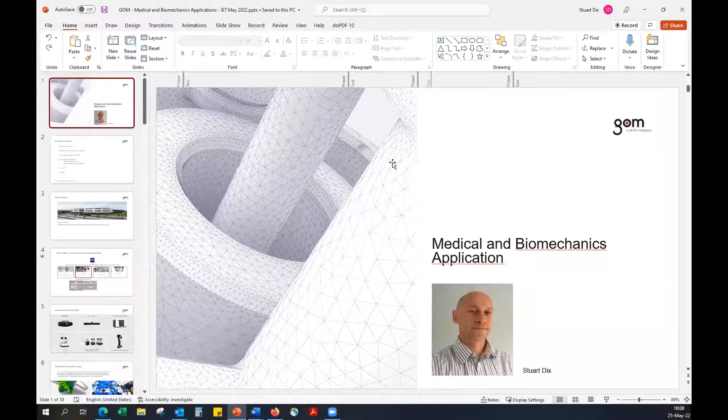So I'll jump straight into sharing my presentation. What I will do is I'll just stop my video because it will probably help with bandwidth and things to run smoothly. So what we should have is the start of the presentation.

So welcome everyone. My name's Stuart Dix. I look after sales of GOM equipment in the UK, specifically in the Midlands or the middle of the UK. And ordinarily I would have been joined by my colleague Amy Hatte, who specialises in one of our portfolios, the testing equipment. She can't be with us today, so I'm going to do the testing bit as well. But any questions at all, please throw them into the question box or the chat box, and we'll try and come to them at the end.

So what are we going to look at today? A little bit of information about who GOM are, who Zeiss are, and where that link comes in. What solutions we actually offer to the industry, so what does our equipment actually do? And then we're going to look at a couple of case studies. One of them is looking at actual medical fitting of a knee using one of our pieces of equipment, the Atos system. We'll also look at Aramis. I'll talk a little bit more about what the two systems do and how they differ. And then we've got a little bit of information at the end just for a bit of fun, and then we'll summarize and go into Q&A at the end.

So the company itself, GOM, is based in Braunschweig in Germany. The next slide is going to lead on to the development of the company and who we are today and over the next few months. But the company was founded in 1990, a privately owned company. And in the UK, we're based in Coventry, and we have 20+ people there, dedicated to sales, support, marketing, training, aftermarket care. So basically everything. So when a customer buys a system, it's a complete journey to get them on the road and gathering good data.

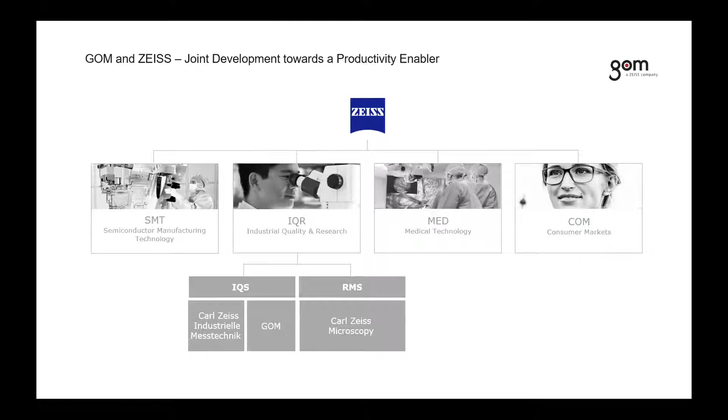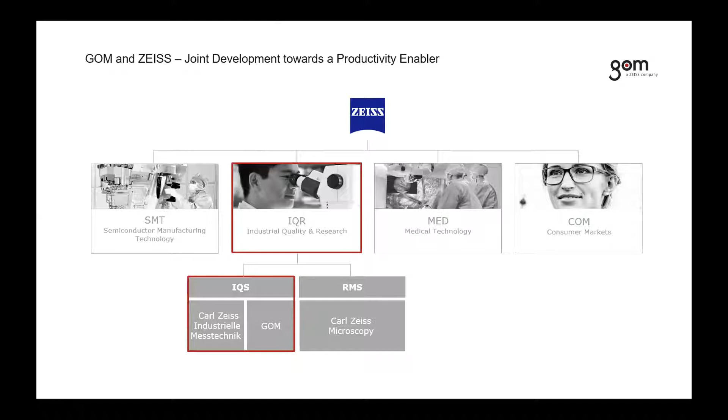So for the last 3 or so years, we've started to merge closer with the Zeiss group, so we're now part of Zeiss. If many of you don't know who Zeiss are, they're quite a major player in the manufacturing and also metrology world. A lot of people wear glasses, and the lenses themselves are quite commonly Zeiss lenses. They also produce high-end optics for digital SLR cameras, microscopes, and those sort of things. There is also an industrial quality section, which is highlighted here, and this is where GOM fit in. So very much the industrial metrology and inspection of industrial components.

So because of this joint venture between GOM and Zeiss, we now have quite a wide portfolio, from 3D metrology to measure the surface of a component, the exterior. We also have 3D testing, looking at real-time deformation, displacement, how things move. We then move on to industrial CT or X-ray systems, where we can penetrate the material of a component and look internally as well as externally, so we can look at dimensional information inside as well as looking for defects. We also have contact systems, CMMs, non-contact vision systems with multi-sensor, and handheld or tracked laser scanning systems. So quite a wide range of systems to suit pretty much any application, any budget, any need.

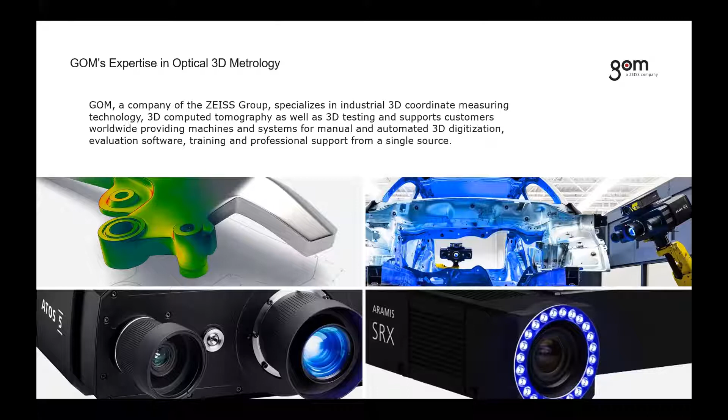So the GOM equipment that we're going to talk around today is specifically Atos, on the bottom left here, and Aramis on the bottom right. These are the sensors, the actual hardware that we develop at the facility you saw in Germany. And we also develop, produce and sell our own software, which is widely used. If you're manufacturing components or have any need for inspection, there's a reasonable chance you may be using our software somewhere. And to finish it all off, we also have completely automated solutions, where our sensors are mounted onto the end of a robot, a high accuracy, high repeatability method of inspection.

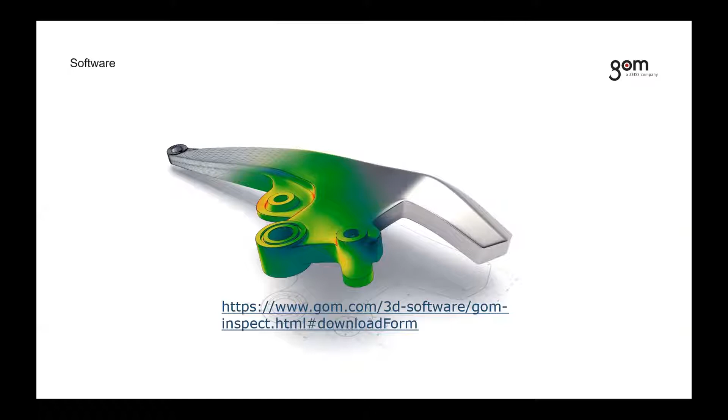And just one final thing on the software. As I mentioned before, it's our own software, we develop it, and all of our solutions come with a seat of software included. The link that just popped up on screen allows you to download a free version of the software. If you want access to this link, just pop a message in the chat and I can get back to you with some more details.

This not only allows you to look at CAD data, you can also use information from a CMM or from a scanning arm, and pull that data into our software. So it's very, very powerful, and as I say, free to download. Then as you grow and need to do more with it, there are further options available.

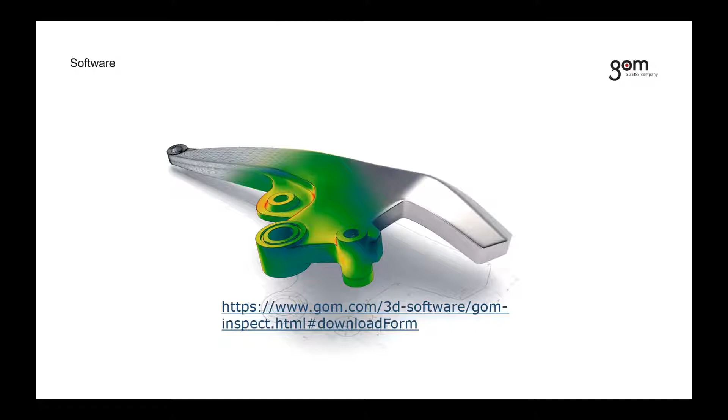So a little bit of information about Atos. I mentioned Atos before - what is it? Atos is the actual hardware for capturing 3D data. It uses high-speed fringe projections to map out the surface geometries of the part. We're capturing hundreds of thousands, if not millions of data points, and creating a 3D digital twin of the part. Once we have that exact copy of the real part, we can inspect and compare against CAD and do dimensional inspection to check if everything is correct as intended with the design.

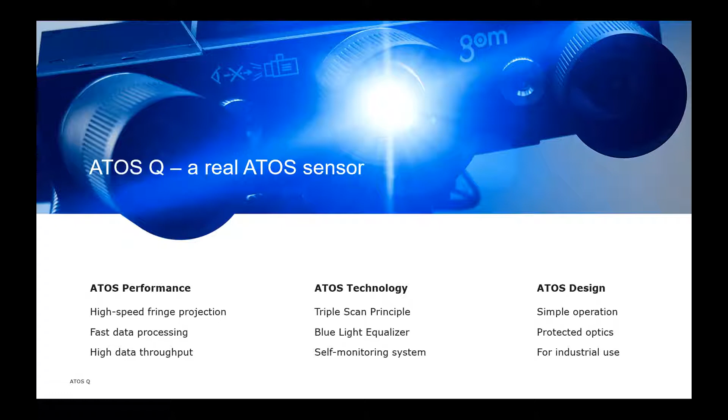This system can be used purely as a manual system, where you point the sensor, move the part, capture more data, and so on. It can also be used in a semi-automated way, where we use a rotation table - an automatic rotation table. You put the part on and let the system do the rest.

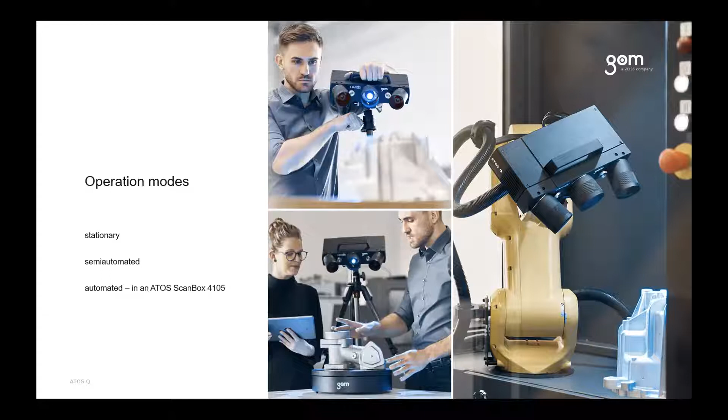We also have fully automated systems, shown on the right-hand side, where we mount the sensor onto a robot. The picture here shows a typical example of measuring multiple parts in one go. In the medical world, say for example, you want to measure multiple femorals, or maybe bone screws, something like that. You can measure multiple in one go, which really speeds up your inspection.

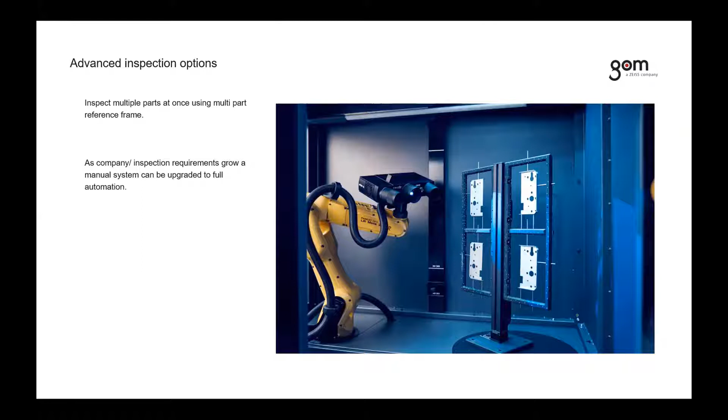I've got a short video that I'm just going to run through now, and it gives you a little flavor of how the system works in reality.

So just a nice little video there to show an example of how the Atos side of things works - capturing external data.

Now we're going to jump into looking at a couple of examples of how this sort of technology is going to be used in the medical world. There's a couple of pointers on here - I've actually taken this from another presentation, so there's a few things taken out that aren't really relevant. But the information I want to share is a case that was done recently, and it fits quite nicely with the story we try to tell with our systems. We're very much providing a solution to a problem.

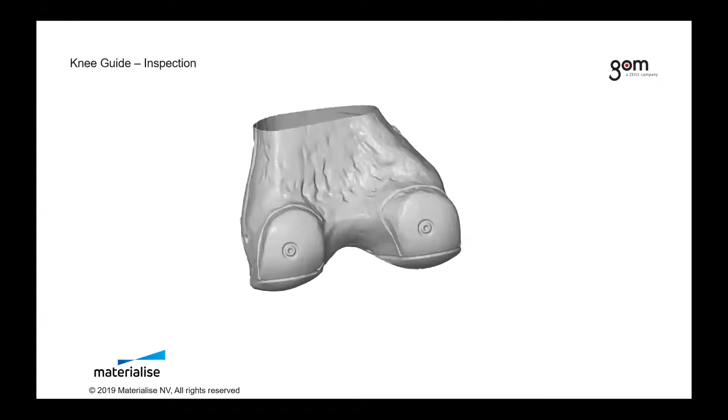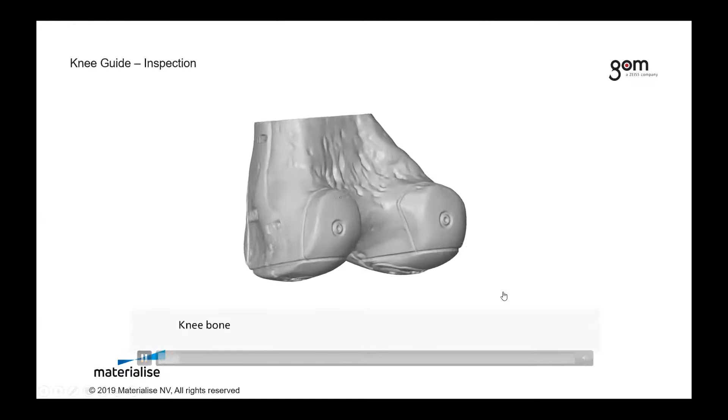So the little video that's going to run through here just shows a typical inspection process. If I just play the video here - so you have the scan data, you can see there very high resolution scan data, and you have the 3D printed guide underneath.

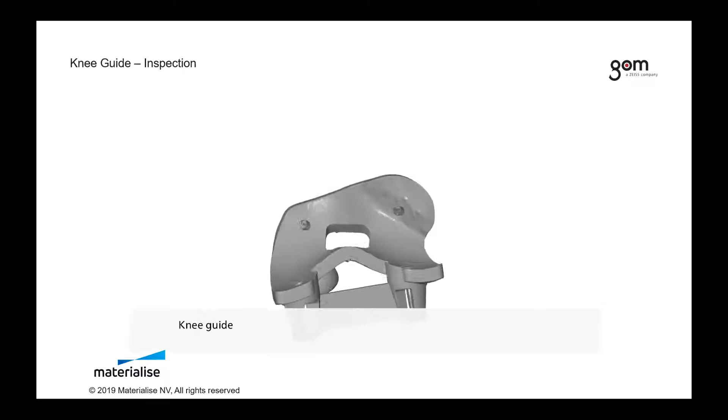And what we'll see in the next scan is the color plot there. So what I'll do is just pause it for a second, because what we're looking at here is typical inspection data that we're pulling out. The resolution, the amount of data points that we capture as standard, is very, very high.

So you'll see here, if I just put my pointer on, you've got different colored areas. The blue areas are telling us where we don't have enough material. Red areas tell us where we have too much material, and green and those sort of warmer colors are telling us that maybe we're in the right place according to our tolerances.

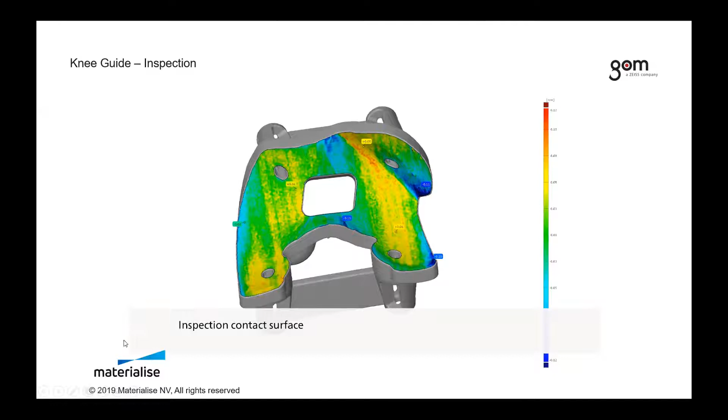So what it starts to do is paint a picture of what is good and what is bad. Essentially the knee, the femoral itself, is going to sit into this guide. So the information we can get from it is whether the knee is going to sit correctly in the guide.

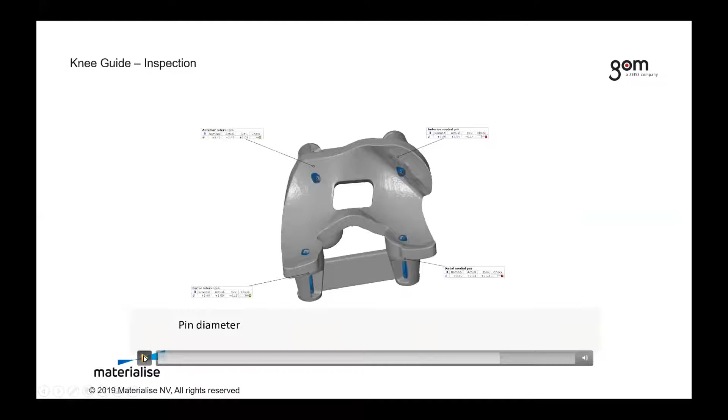In the case of this image, you've got the diameter of the pins and the actual positions of the pins themselves, because it's highly important that they're in the correct place. If it's not in the right place, the surgery can't go ahead, and everything has to be repeated another day. So it's lost time, increased cost to the NHS, all things that are really unacceptable. It's a nice example of where this type of technology is used on a day-to-day basis.

What I'm going to do now is move on a little bit to the Aramis side that I talked about before. Just as a recap, Atos is for capturing external geometries - we're digitizing and scanning the whole surface and creating a static digital twin of the part.

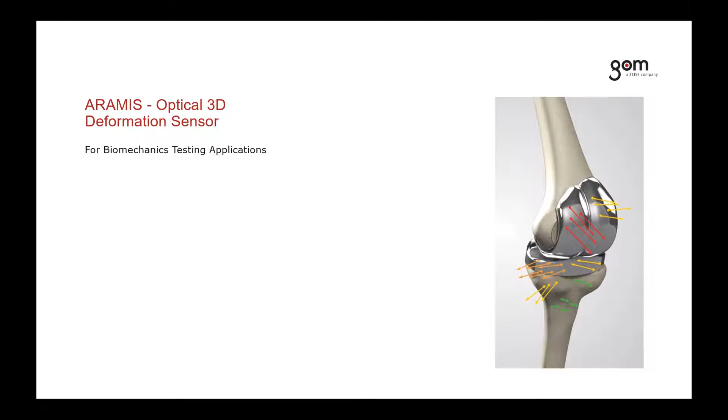What the Aramis systems are doing is optical, non-contact measurement of deformation. We're looking at how things move, how things twist, and how they react to being put under load. In a similar way we have a light source, and two very high-speed cameras that give us very high frame rate measurements of the part, very high detail. It gives us a lot of information, such as how things move, not just in one axis, but in 6 degrees of freedom in this case.

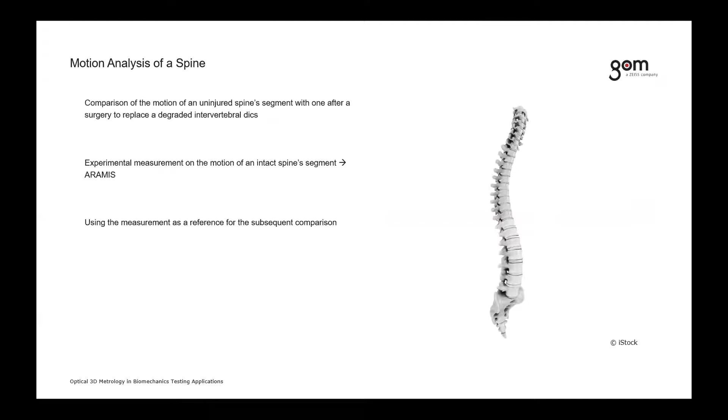So it can suit pretty much any application, but specifically today we're just looking at medical. The example we're going to look at here is the actual real-time motion analysis of the spine, in particular looking at things like disc protrusions, that sort of information we're trying to pull out.

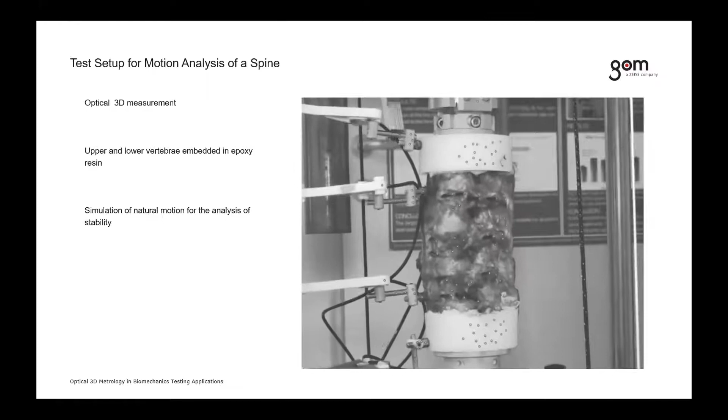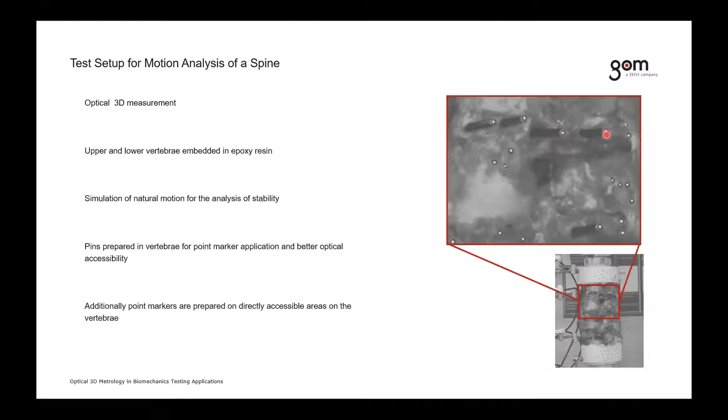In the video you see here, this is a typical test rig, if you like. They've taken a section of spine, and you can see there's a number of dots positioned on it. This is what the system will use to track in real time what is actually happening as the part is moving. You can see a zoomed in section of the setup - there are some pins positioned into the actual bone itself, with little reference points on top. Again, this allows us to track what is going on.

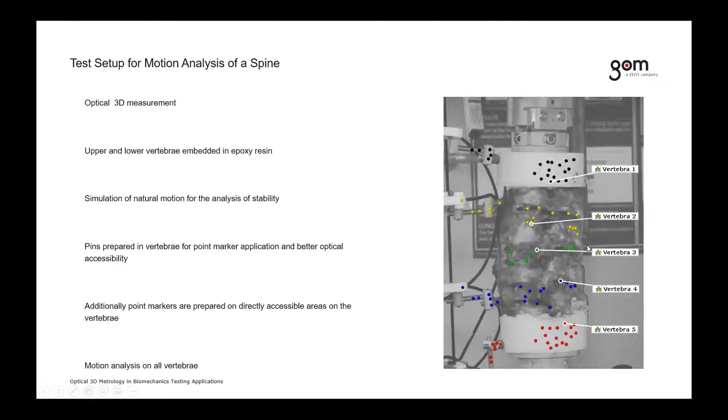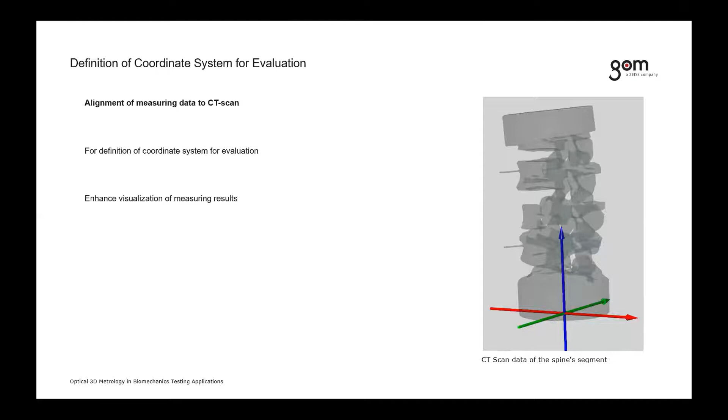The information we gather from this allows us to create reference data, and you can see the different colors representing different vertebrae in this example. This is a nice slide because it shows how we can link Aramis data to different types of scan data - in this case CT scan. So we've got internal and external data going on. Once we have all that information together, I'll move on to the next one.

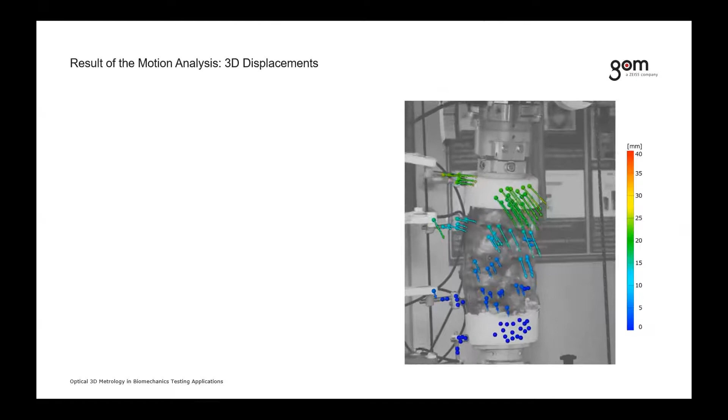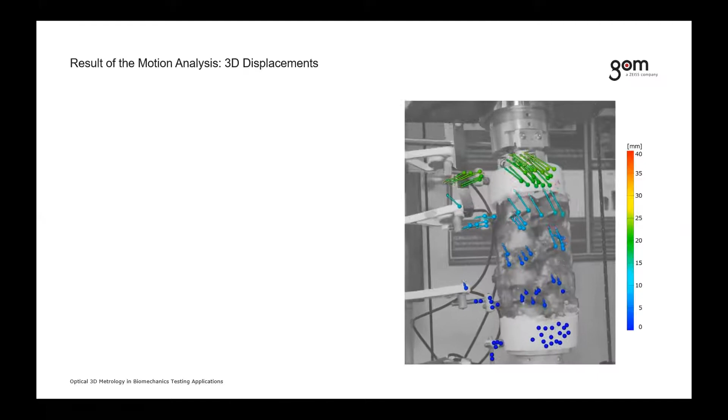This is the sort of information we can pull out using the software - it's actually tracking those points and looking at the vectors. So as the part is put under load, we can see what is actually happening. Simulation software may tell us that when you load it in a certain way, it will move and twist in a certain way with a certain amount of force. This data, because it's real time, is actually looking at the part itself. This gives us real time information of how things move, at what force, and in what direction - so very, very powerful information.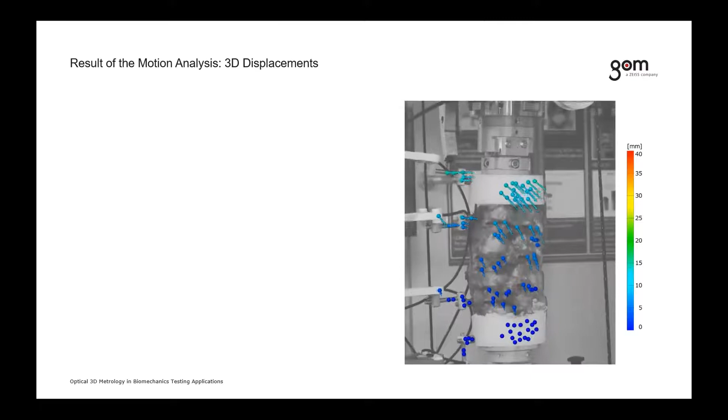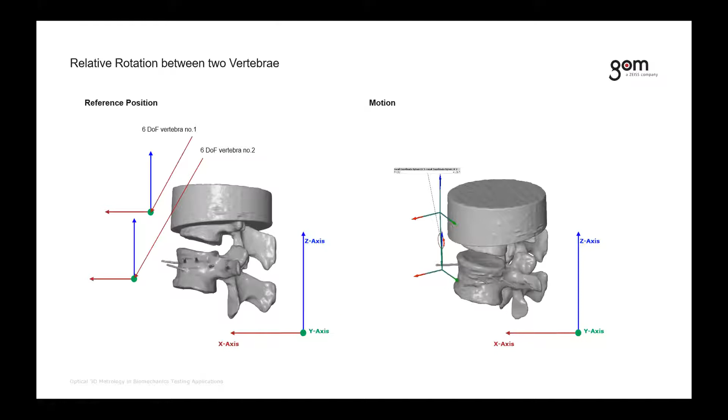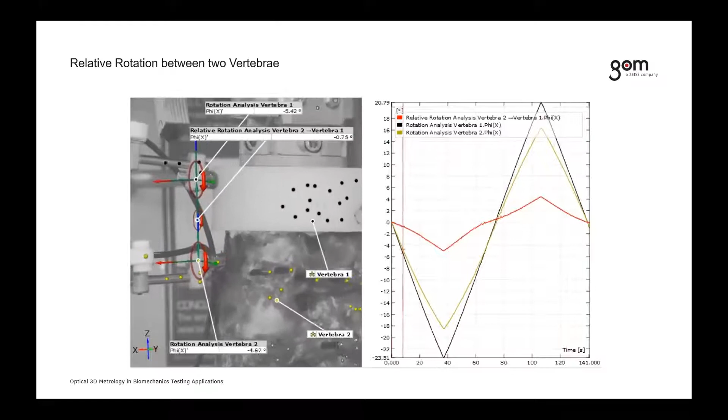This is just another example. You can see the gray part - these sections here are actual scan data, captured with either Atos or maybe CT data. We can then combine that with Aramis to actually see how things twist and how they move. Again, this is the same sort of test but looking at different data - rotational movement graphically, so you can pick out certain points as you can see here.

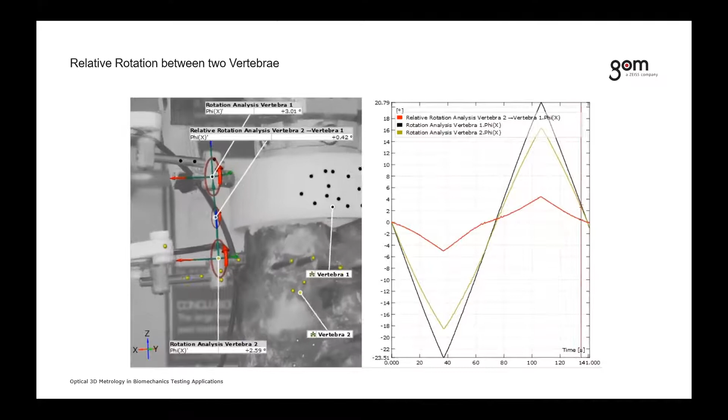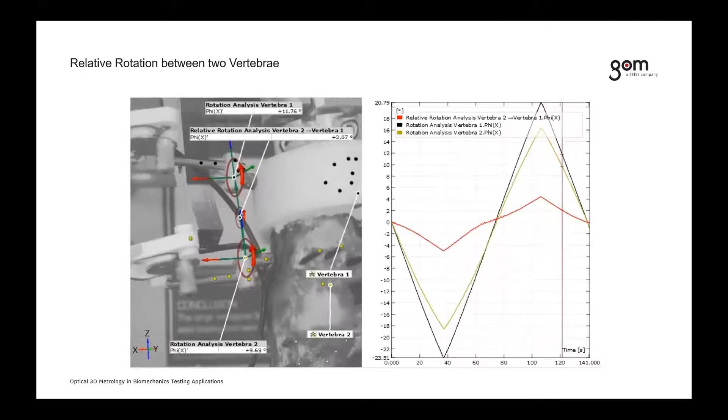Once we've scanned the data, either with Atos or CT, we've got a lot of options available for how we analyze it. That's where it becomes very powerful, because traditional analysis of how things move might involve using strain gauges or LVDTs. The problem is you're only measuring the strain or stress in one particular place. You don't know what's happening elsewhere. This is where this technology fits very well.

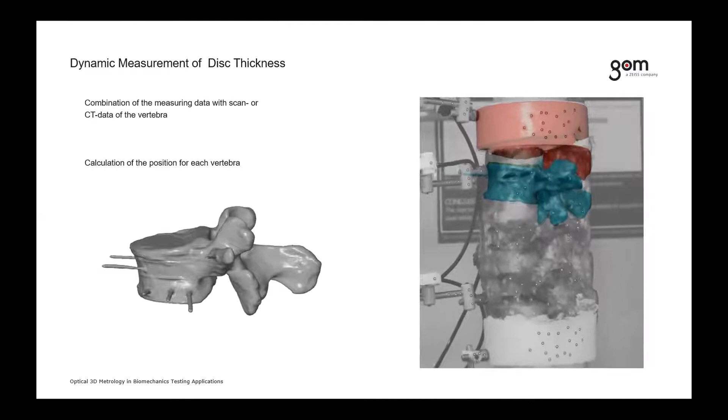This slide combines scan data from Atos or CT, looking at the actual gap between this particular vertebrae and the next one above it. You can see from the color plot that warmer colors indicate a larger gap, and cooler colors indicate a smaller gap. It's very visual - you could show that to anyone and it's quite clear what's going on. As the vertebrae are loaded, bigger gaps appear, and obviously smaller gaps appear elsewhere.

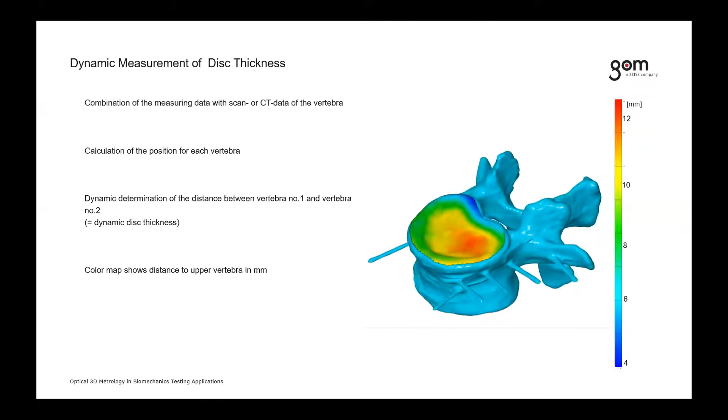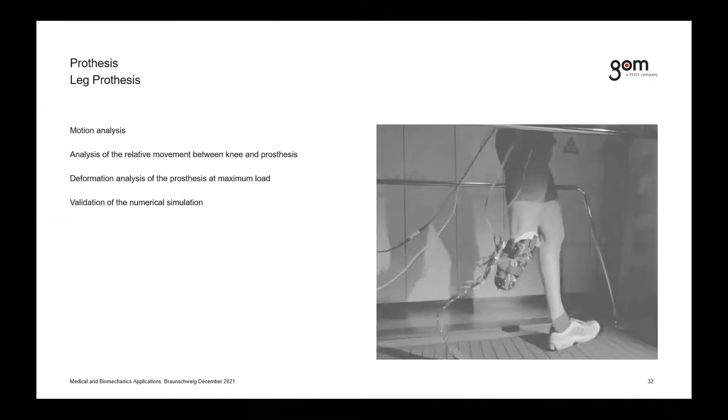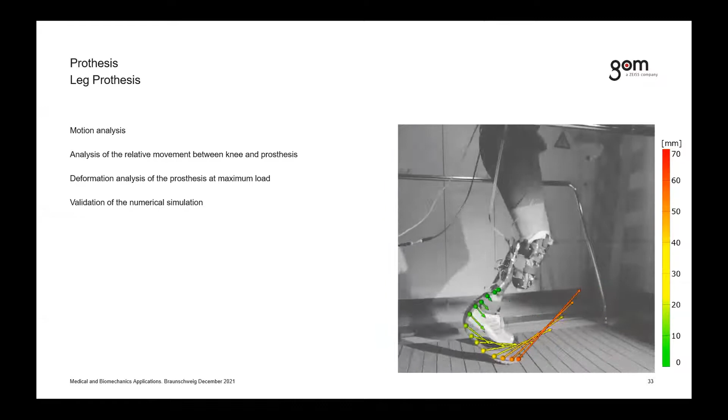The next example is again an artificial leg limb. This is a similar test, but we're looking at faster movement - it's slowed down slightly, but it's tracking the limb as the person runs on the treadmill. The next slide gives us high-level data to see how much the blade is moving in a certain area. This is all to do with validating simulation data.

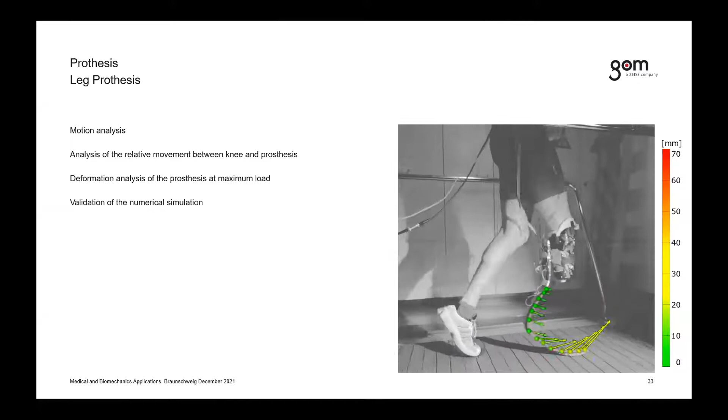Simulation data will tell us so much, but it's not real life. This is actually showing us what's happening in real time. Because we're tracking points on the part itself, we can use the software to pick out certain points and plot them graphically - how is point 1 moving compared to point 2, point 3 in this case. So again, a really powerful set of data.

That pretty much brings it to the end of the examples I wanted to show. There's another slide I want to show here, which is just for a little bit of fun, really.

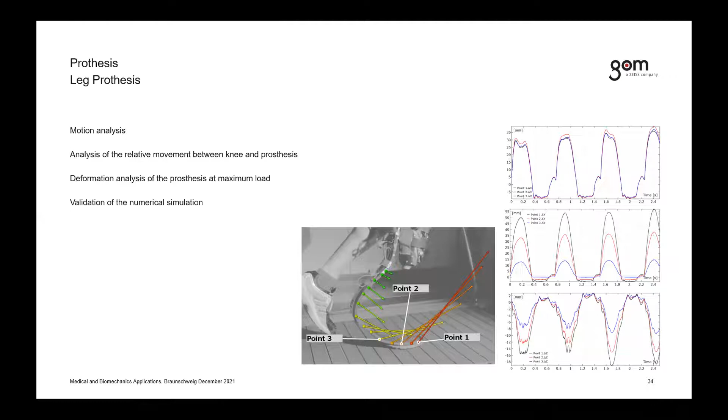We engaged a lot of colleagues, both in the UK and worldwide, to share their own videos using this type of data. This is really just to show what you can do once you've got this data - it's not specifically for looking at medical implants or how an airbag goes off, that sort of thing. So I'll just show this with you guys.

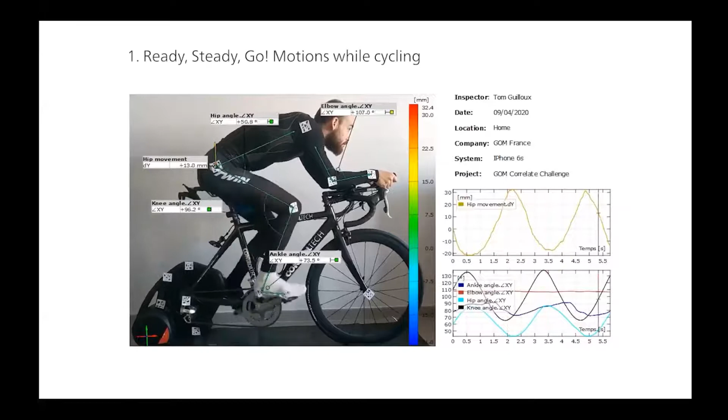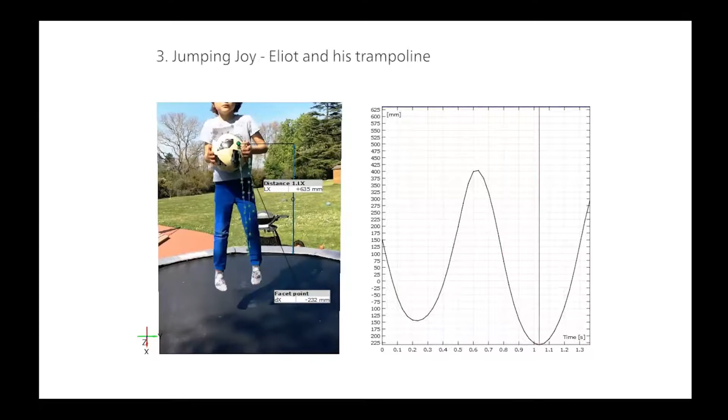This was an actual competition we ran between all of our colleagues to see who could come up with the best idea, the best thing to track and to show.

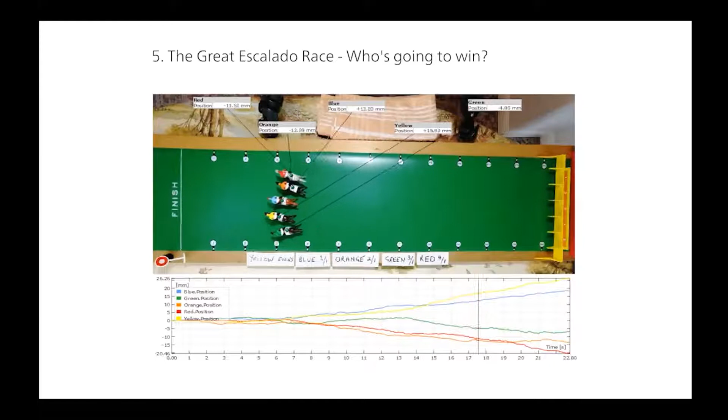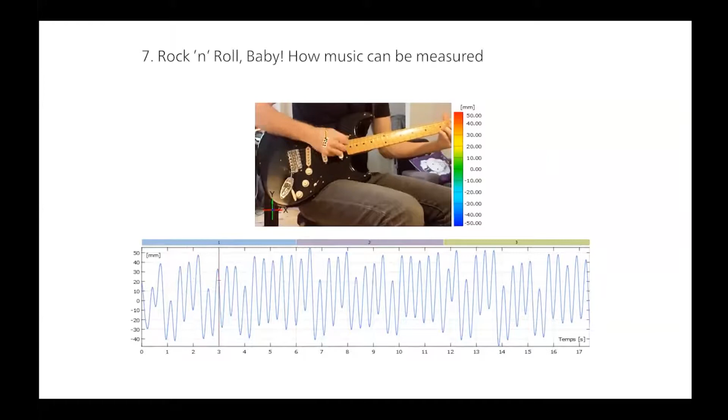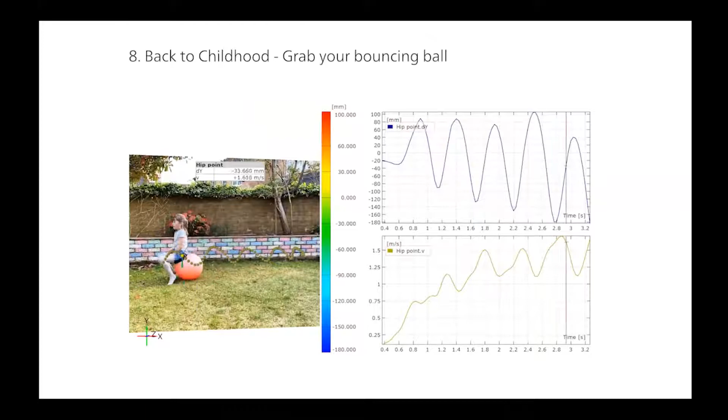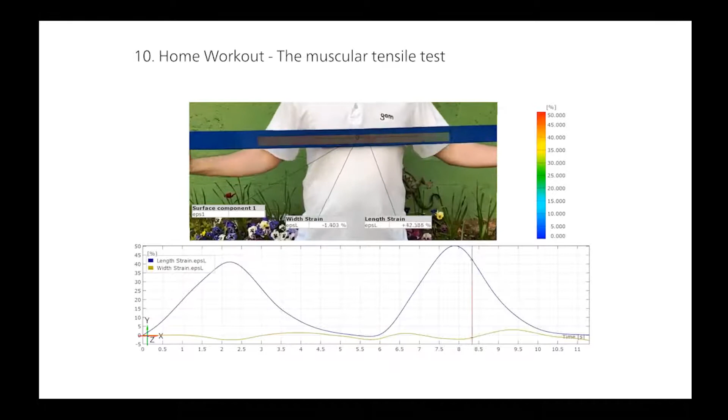Hopefully this might be inspiring some of you as to where you could use a similar technology, or maybe it'll fit in for what you're doing as a work challenge. As I say, a bit of fun at the end, just to show you what's possible.

So, summary of what we've talked about. The actual portfolio of solutions is pretty much any solution to suit any budget and any application. We have systems that can be used to measure external geometries - this would typically be the Atos systems. Or we can look at real-time deformation, displacement, stress, strain - this would be the Aramis side of things.

All of the systems can be scaled up or down. You have the main basis of the sensor, and then by just exchanging lenses, we can go from measuring something very small, the size of a coin, all the way up to something as big as a wind turbine blade, a helicopter blade, or a complete vehicle or boat. We have various solutions - handheld systems, laser-based systems, manual or semi-automated systems, all the way through to fully automated solutions for measuring complete vehicles inside and out, as an example.

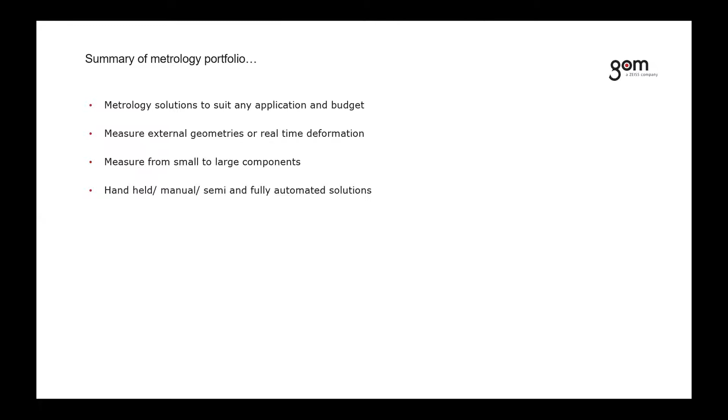One of the key things for us is that we have one software that suits all products, and this is software we've developed ourselves. It's very much a metrology-based software. There are a lot of softwares out there that do lots of different things, but in some cases the actual metrology side - pulling out dimensional information - is sometimes not so slick, maybe a bit clunky. The software we've developed is very engineering driven.

You can use this software with multiple data sets - you might have point cloud data that's come from a CMM, or point cloud data from a scanning arm, or just lots of single data points. This can all be pulled in and analyzed using the GOM software.

Whether you want to measure internal or external features, we have those solutions again within the Zeiss group, because we have CT systems now that can measure most materials, whether it's plastics, whether it's metals like steel, tungsten, cast iron, even something very, very dense.